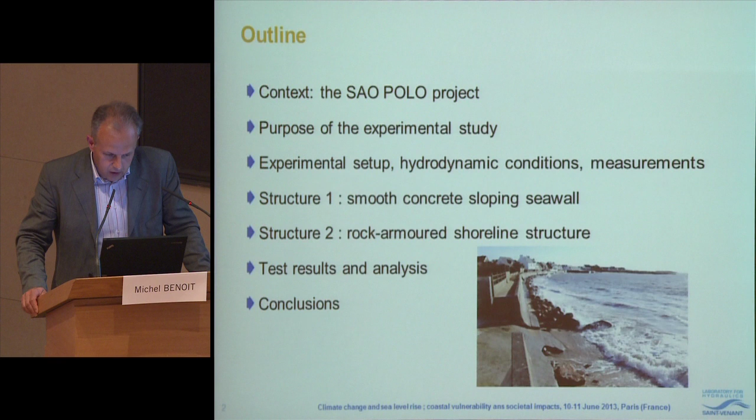The SAO POLO project stands for Stratégie d'adaptation des ouvrages de protection marine et des modes d'occupation du littoral vis-à-vis de la montée du niveau des mers et des océans, in French. You have an approximate translation in English just above.

It's a research program supported by the French program on management and impacts of climate change, partially supported by the French Ministry in charge of ecology, sustainable development and energy. Here you have the various participants in the project.

Cetmef was the leader, with Philippe Sergent responsible for the project. Also involved were the University of Compiègne, the University of Le Havre, and Le Havre city itself, along with ourselves, Reportex, and another body also belonging to Le Havre city, because one site of application of this research focused on the Le Havre area.

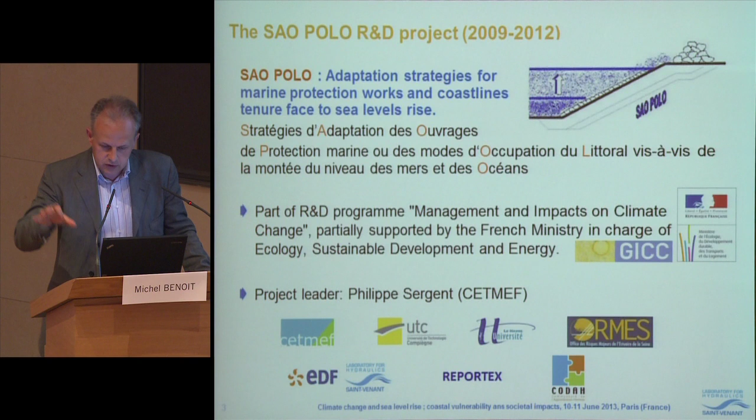The purpose of this project was to provide a coherent system of technical tools to enable the study and evaluation of adaptation strategies, for instance reinforcement of coastal defenses and so on. There were several work packages that you can read here - I won't go into detail on all of them, sorry.

My presentation today deals with items number 2 and 3: more precisely, estimating present and future performance of coastal structures, and studying reinforcement or modification of these structures. But there were other tasks focusing on evaluating the costs associated with these modifications, and developing a decision support system to help choose a strategy.

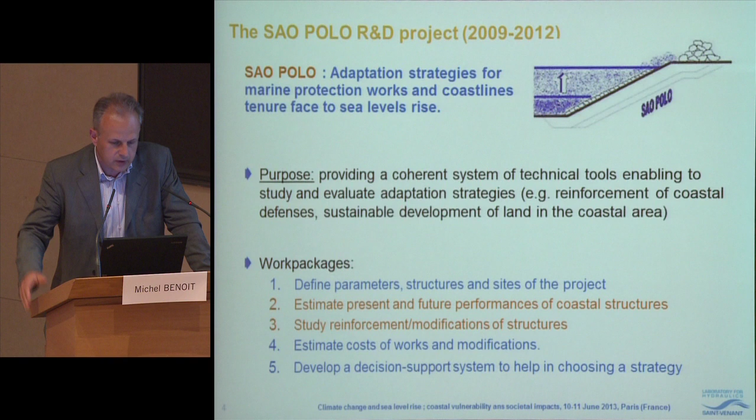The purpose of the part of the project I will present today is to evaluate the performance of structures, both in terms of overtopping rate - the volume of water which overtops the structure - and stability of the structure.

We do this under hypotheses for future sea level rise. In this study, we do not conduct specific studies on how sea level will rise in the future. We take results from other studies and use this data as input to fix future sea level in our experiments.

The idea is to test and compare various reinforcement solutions for future scenarios, and to find modifications and improvements that will permit keeping the same level of efficiency of protection as we have today in the present sea level condition.

To say it differently, this study is a technical contribution to the strategy of hold the defense. If we want to choose this strategy, this project and these tests were designed to see what modifications would be necessary to keep this goal. I do not claim this is the only strategy, of course, but just want to make clear that we are acting within this frame.

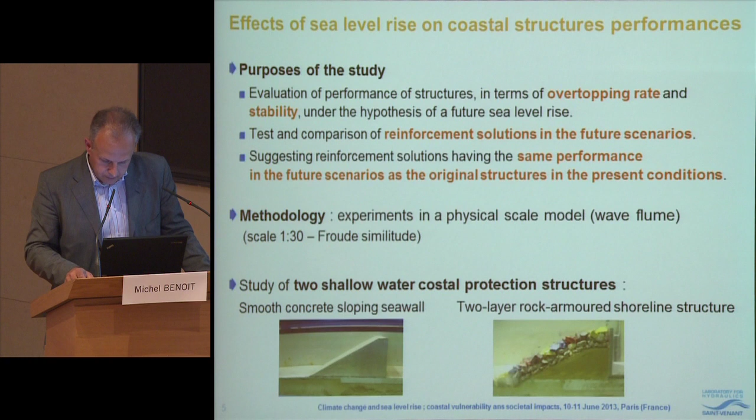The first one is a smooth concrete sloping seawall, so an impermeable sloping structure. And the second one is a rubble mound type structure, made of a core of rubble mound of sand or typical material, then an underlayer of rocks and one or two layers of rocks on the armor. For doing these experiments, we use one wave flume in Chatou.

So here you have the dimensions of the wave flume. Typical width of the flume is 60 centimeters, and the flume is equipped with a piston-type wave maker, which produces waves using a translation type of motion. It is computer controlled, and we can generate both regular, monochromatic, or irregular waves.

In these experiments, we used what we call irregular waves or random waves. We also have the possibility to absorb reflected waves from the structure by proper monitoring of the wave pattern. This is what we call an active wave absorption system.

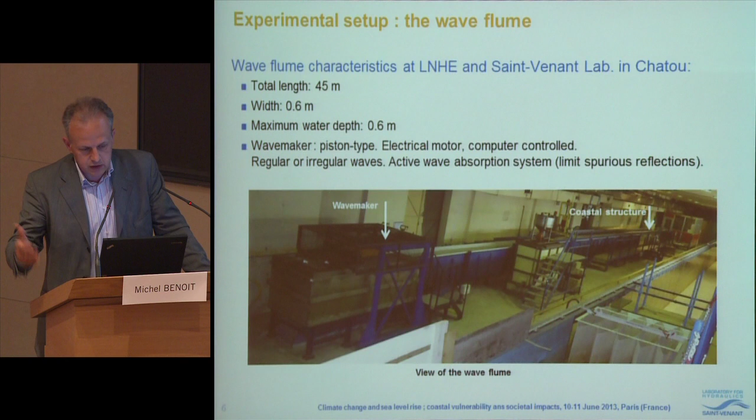So here you have a typical view of the experiments. The wave maker is on the right here. We have a sloping bottom with a mean slope of 5%, and then we have the structure under study, either a concrete structure or rubble mound structure as I said before. We have a number of wave probes here to measure incident wave conditions and also wave transformation on the sloping bottom.

The structure was designed so that in the present condition, the water depth at the toe of the structure corresponds to 3 meters. All the dimensions I will give refer to prototype values, so real values, not at the model scale.

For the present situation, we have a water depth of 3 meters at the toe of the structure, and we will carry experiments by increasing this water level first by 50 centimeters and then by 1 meter. So the depth at the toe will change to 3.5 meters and accordingly to 4 meters in the two scenarios.

So, wave conditions. For this study, we consider that the offshore wave conditions, the conditions created at the wave maker, do not change in future scenarios. This can be discussed, of course, but based on recent studies and ongoing studies that we are carrying out in the lab, there is no clear trend that wave height will increase or decrease significantly. So this assumption of keeping the same wave condition offshore seems acceptable.

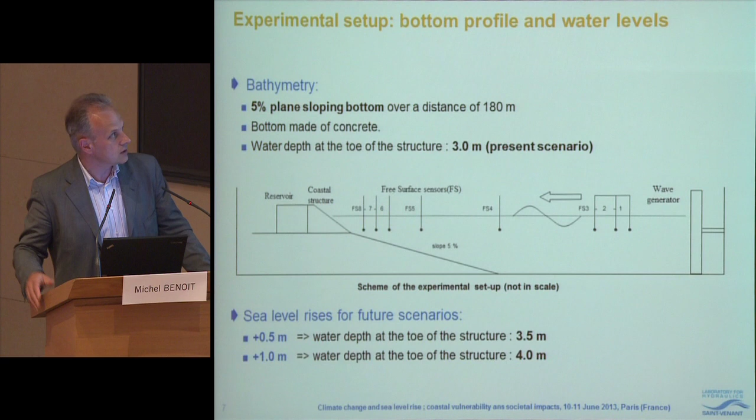But of course, this refers to offshore wave height, and as the water depth changes, the wave conditions at the structure will also change because of the larger water depth. So the waves that the structure will experience will change from the present situation.

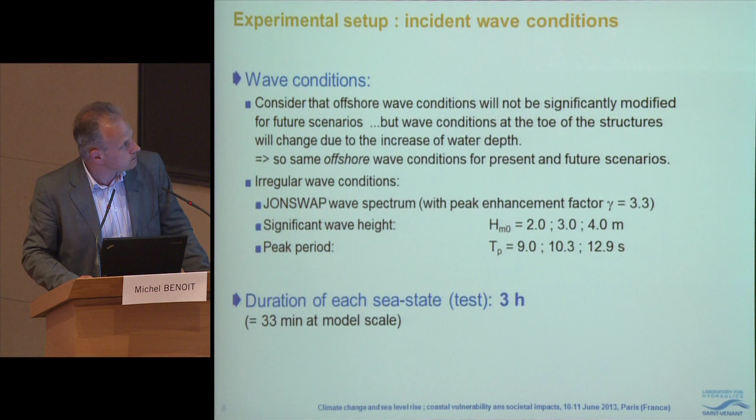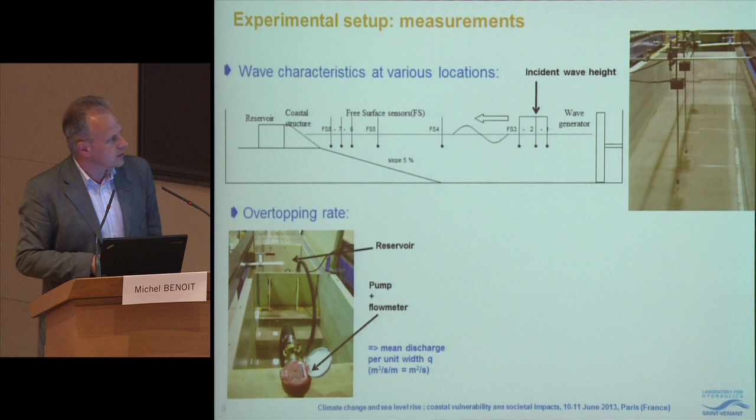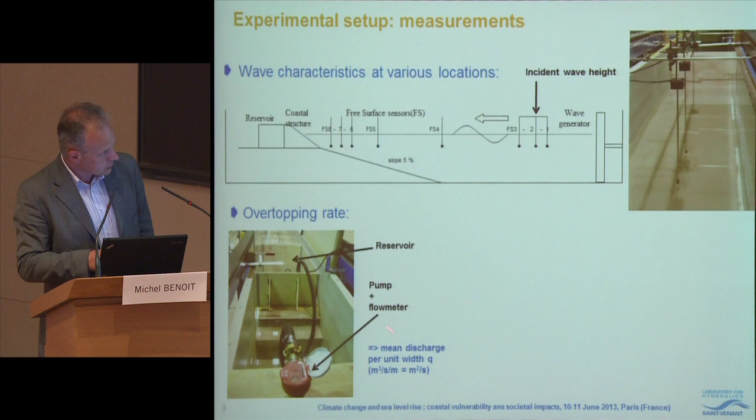And from this, we can compute what I call the mean discharge per unit width, small q, which is a discharge for unit distance in the transversal direction. So the unit of this q is square meter per second.

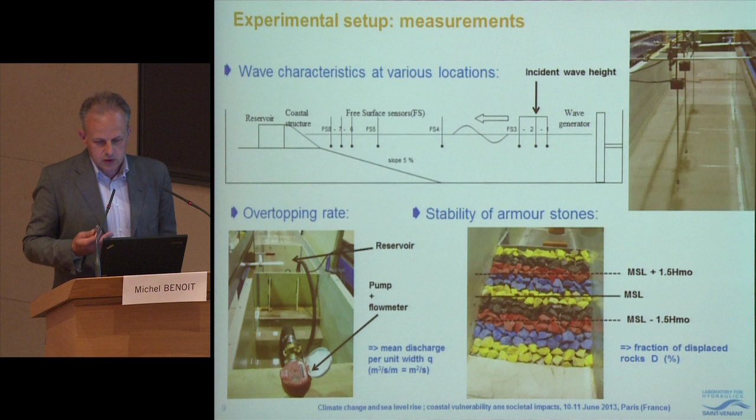And finally, for some structures, we also study the stability of the armor stones. The stones placed on the armor are painted with different colors, so it's easy to follow which stones are moving. We count the number of stones moving in a range of plus or minus 1.5 times the wave height from each side of the mean sea level at rest. This allows us to evaluate the fraction of displaced rocks, which I will call D, expressed as a percentage of displaced rocks.

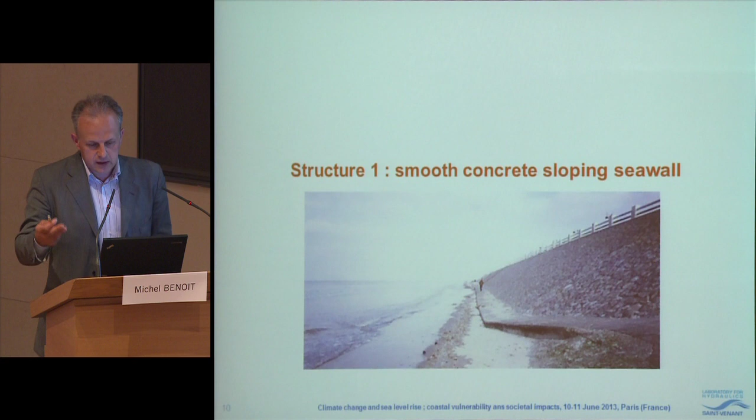So now I come to the first type of structure, which is a smooth concrete sloping seawall. Here you have a sample photograph of this type of structure. It's impermeable, a type of structure that we quite often find on beaches, on the upper part of beaches for instance.

And so in the model, it looks like this. It has a slope of 1 to 2, so 2 in the horizontal dimension and 1 in the vertical direction. The height of the structure was designed to have about 5 liters per second per meter of overtopping discharge in the present conditions, with a water level corresponding to a water depth of 3 meters at the toe of the structure. The crest elevation of the structure is 9.6 meters above mean sea level.

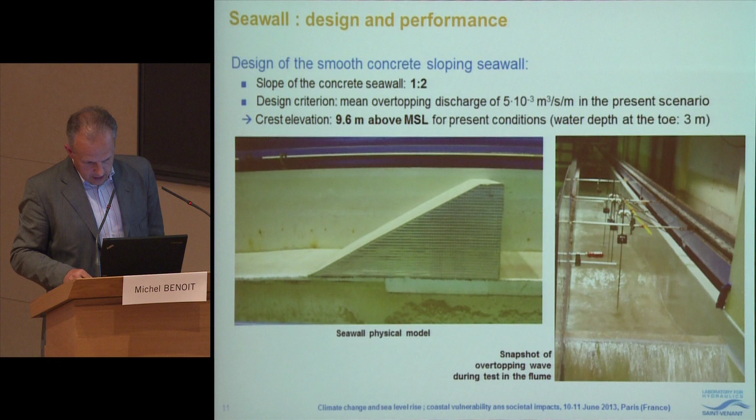So you have some snapshot photographs during tests in which you have some overtopping at this particular moment. I will not present all the results we obtained in these experiments, only some of them.

The first thing we did is to evaluate the increase of overtopping discharge when the water level is increased by 50 centimeters or 1 meter. Typically we represent results on this type of graph. Here you have the offshore significant wave height - we tested 3 values: 2 meters, 3 meters, and 4 meters. These are the results for only one of the 3 periods we considered, the period corresponding to almost 13 seconds.

On the vertical axis you have the unit mean discharge, with the target value of about 5 liters per second per meter as I said before. So in the present condition, this is the curve which describes the efficiency of our structure.

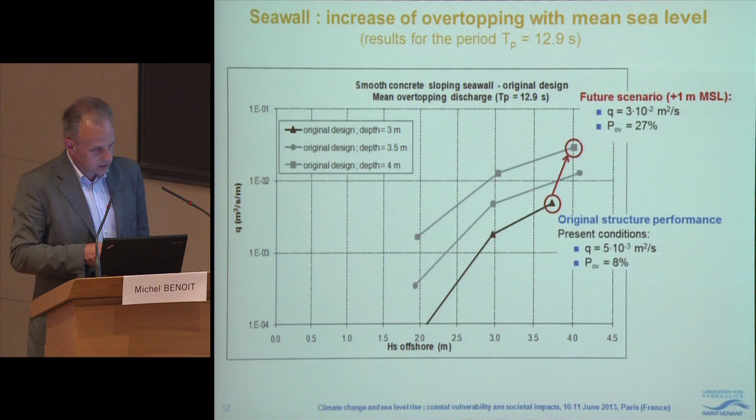For about 4 meters of significant wave height, we have this design overtopping discharge. If we increase the water level by 50 centimeters, and then by 1 meter, we obtain these two curves. As you can see, when the mean sea level is increased by 1 meter, the water discharge is multiplied by approximately 6 - so we have 6 times more water overtopping the structure in this condition.

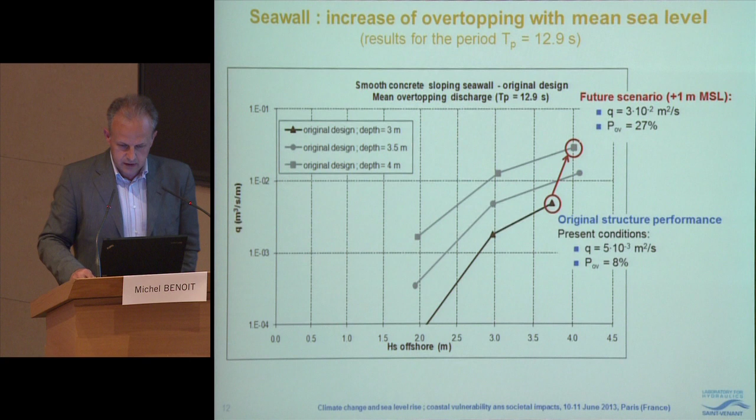So this is the first part of the study - knowing better what happens if we do nothing, keeping the structure as it is, so we have data to quantify the effect of increasing the water level. The second part is to test and study various modifications of the structure in order to recover the same efficiency as before.

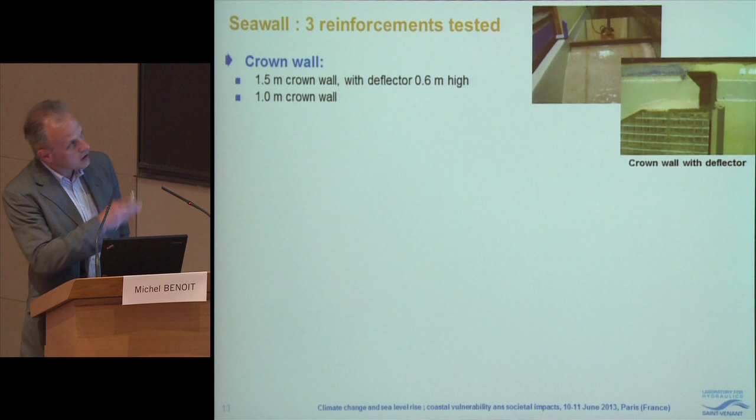So here we tested 3 modifications of the structure. The first one is building what we call a crown wall - a wall on top of the structure. Here you have a photograph. We tested 2 variants for this crown wall: the first is simply adding a vertical crown wall of 1 meter, corresponding basically to the increase of mean sea level. Then we tested another option with a 1.5 meter higher crown wall, also adding what we call a deflector, modifying the shape to improve its efficiency.

Then we also tested a solution which consists in putting rocks on the structure, and so we tested the possibility to add one layer of rocks or two layers of rocks. These stones were 4 to 6 ton rocks.

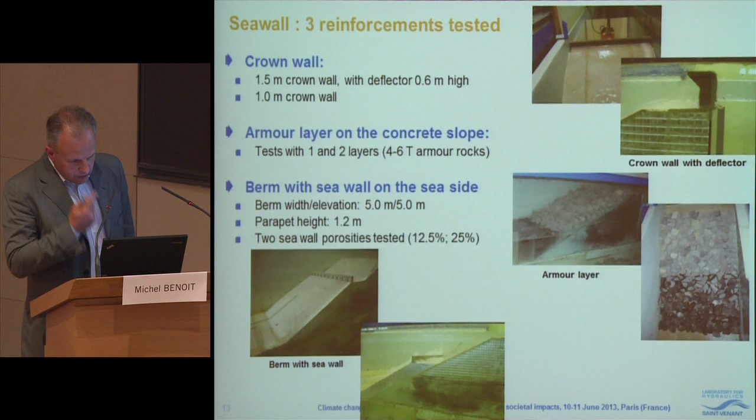The third option we considered was to build what we call a berm, an additional part in the structure. You can see it here in the side photograph. This is a horizontal berm plus a vertical wall with some porosity in it. Here are the characteristics of this wall: it's a 1.2 meter height parapet, this perforated wall, and we tested two porosities.

So we did quite a number of tests on these various solutions, and here I present you the results we got, the main results.

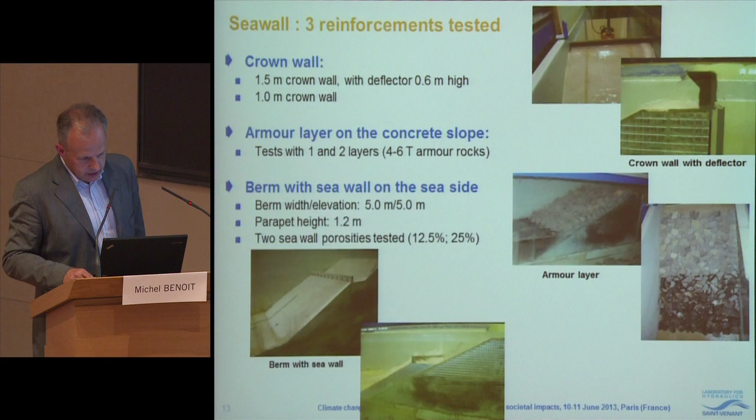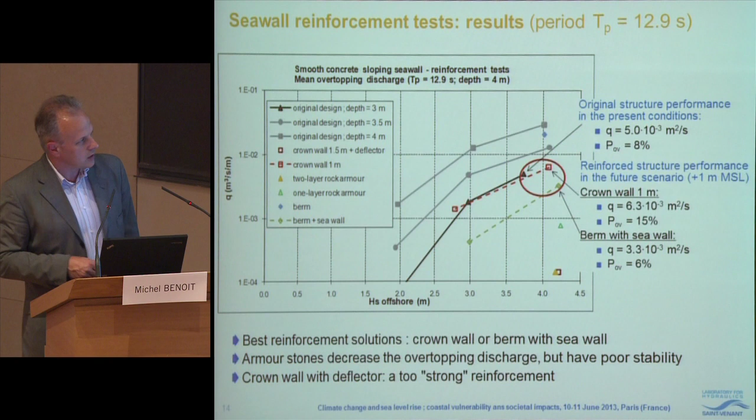So in this case, the structure which appears quite suitable was the crown wall, adding a vertical crown wall on top of the structure, and also the berm, adding a berm in front of the structure with a parapet. As I said, the armor stones put on the slope decrease the overtopping, so in this sense they are quite efficient, but they have insufficient stability. And the crown wall with the deflector is maybe, as I said before, a too strong reinforcement.

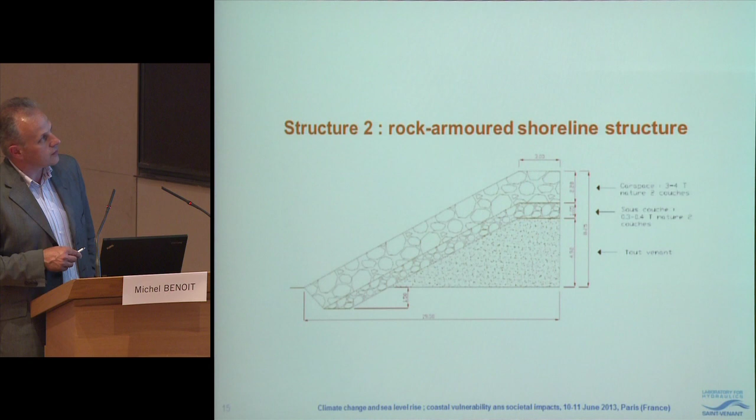So now I move to the second structure. This one is a rock armored shoreline protection, so again we have an underlayer of rocks and one or two layers of rocks on top. And we did the same type of study.

Here are the design criteria for this structure. Again, the slope is typically the same, 1 to 2, for this structure. We chose the size of the stones so as to have a level of damage lower than 5% in the present condition, with the mean sea level of the present condition. So we designed the weight of these stones to meet this criterion, and we used a double layer of stones which have a weight in the range from 3 to 4 tons.

And the crest elevation of this structure was also designed to have the same level of target water overtopping in the present conditions, the same value as before. This gives us the crest elevation of the structure above mean sea level for the present condition again.

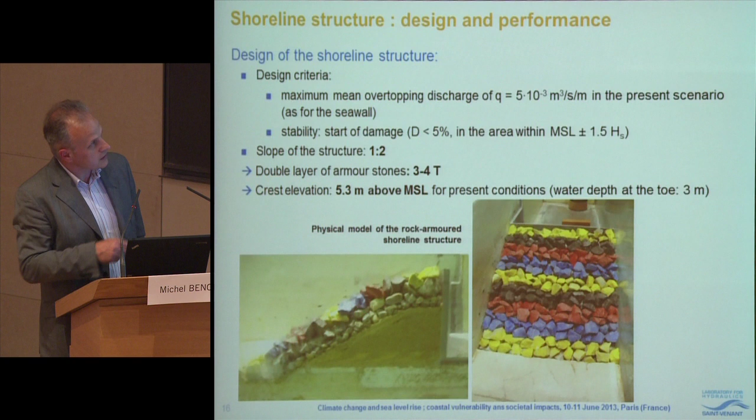We followed the same methodology, the same steps, starting by seeing what would be the increase of overtopping discharge if the water level is increased by 50 centimeters and then by 1 meter. If I plot the figure here, you have the present value, the overtopping discharge in the present condition. These are probabilities of overtopping, and this is the level of damage, a very moderate level of damage because we have 1.5%.

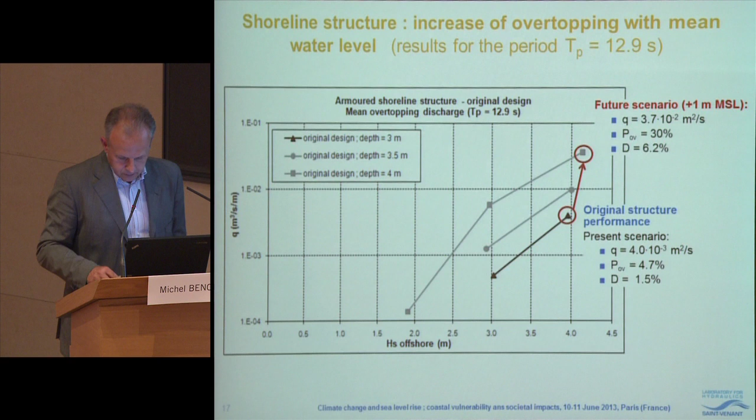If the mean sea level is increased by 1 meter, the overtopping discharge is increased by a factor of approximately 10. So we have a significant increase in overtopping discharge. Also the stability is lower because we now have more than 5% damage on this structure. So the second part of the study is to test various modifications to this structure.

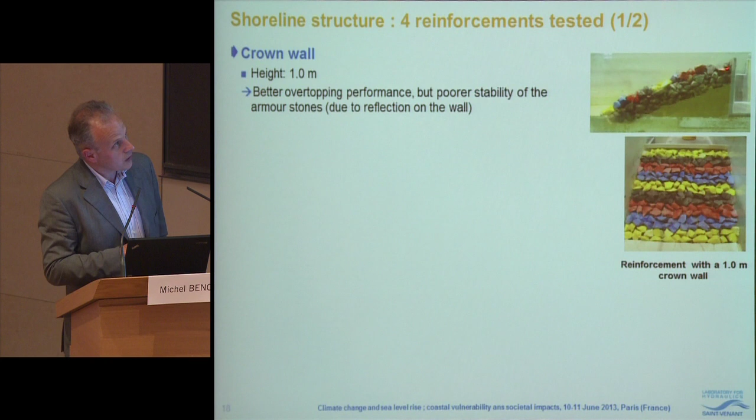For this case we tested 4 modifications. The first one is adding a crown wall on top of the structure, with a height of 1 meter. This allows us to increase the overtopping performance of the structure, but it also implies lower stability of the stones because of reflection on this vertical wall.

We also tested the option of using an additional layer of rocks, adding a third layer on top of the existing armor, because this might be a solution in practice. We combined this with a crown wall. So we tested, in fact, 5 options on this case.

We used 2 categories of rocks: the 3 to 4 ton category, same as the present one, and the 5 to 6 ton category, which is heavier than the present ones. We also tested various heights of the crown wall, from 1 meter to 2 meters.

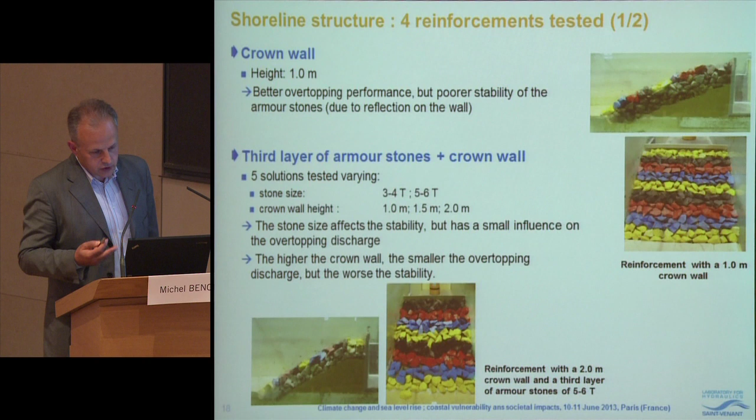What we observed is that stone size affects stability. Of course the heavier stones are more stable, but there's no clear difference between these two categories in terms of overtopping discharge. We also saw that the higher the crown wall, the smaller the overtopping discharge, but also the worse the stability.

We also tested the option of modifying the slope of the structure, to have a milder slope of 1/3. This allows us to use lighter stones, so a lighter category of stone is enough if we modify the slope of the structure.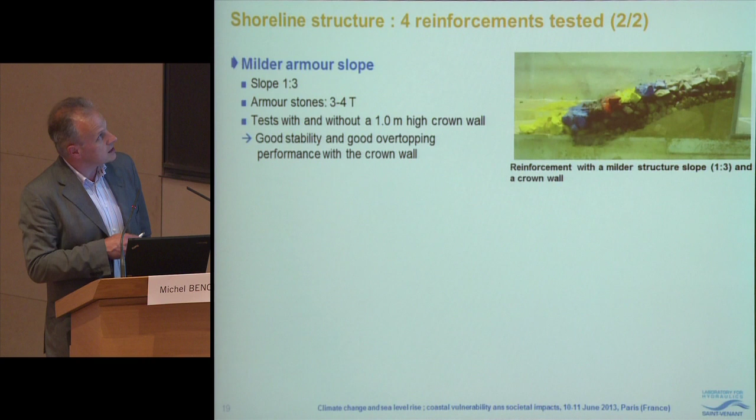We tested this with or without a 1 meter high crown wall. In this case we obtain good stability and also good overtopping performance with the crown wall only.

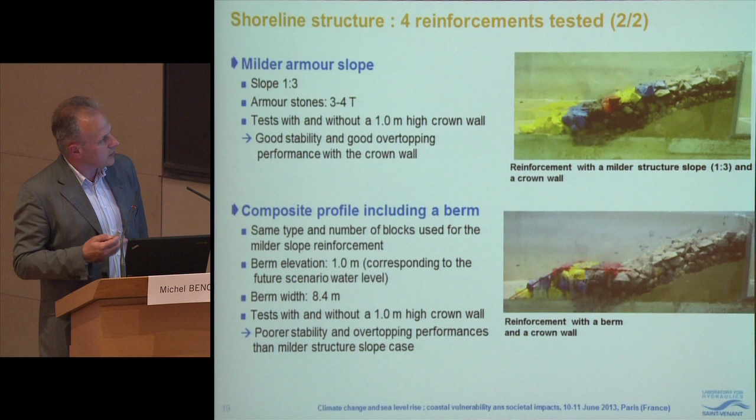Finally, the fourth option was to build what we call a berm in front of the structure. Here you can see the characteristics of this berm. The level of this berm corresponds to the future mean sea level, the present mean sea level plus 1 meter. We tested this solution with or without a crown wall 1 meter high, and this showed poorer stability and overtopping performance than the other option.

These observations are plotted on these graphs which sum up all the tests we did. Again, the target is for the colored points to be near these black triangles in the future condition. In this case, most of the solutions were unable to reduce the overtopping sufficiently to recover the target value.

The two most efficient solutions were adding a third layer of heavy rocks plus a crown wall of 2 meters, quite a high crown wall, where the height of the crown wall is twice the increase of the mean sea level, and also using a milder slope with a crown wall of only 1 meter.

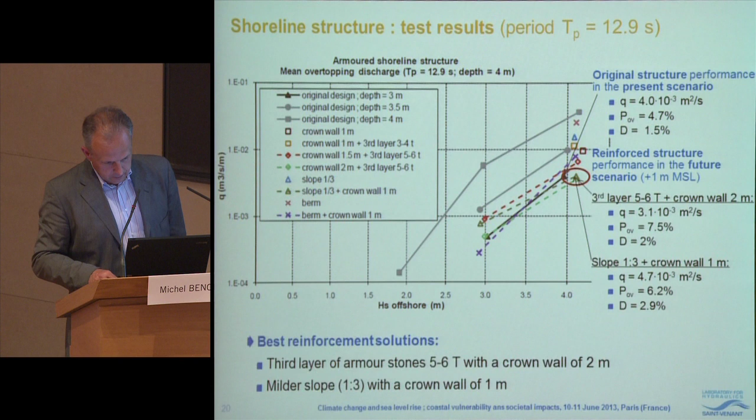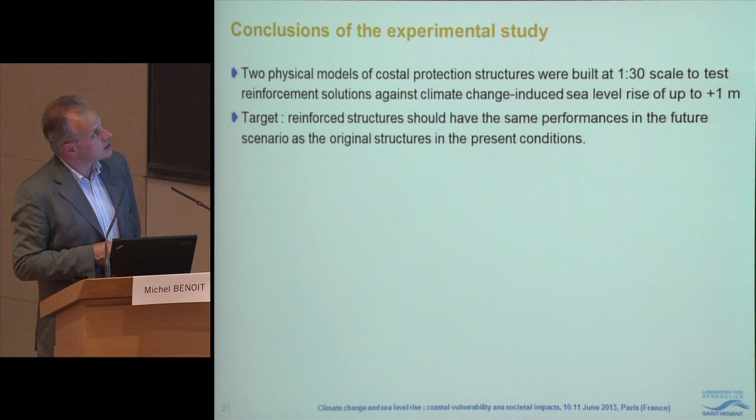Coming to the conclusions: two physical models were built to do these experiments. In terms of overtopping discharges, the use of a parapet on a berm on the seaside or on the structural crest, namely a crown wall, is necessary to limit the overtopping discharge independently from the structure considered. We observed this both on the sloping wall and on the rubble mound breakwater. We also observed that stone size does not have a significant impact on the overtopping performance of the structure, among the values we considered in this test.

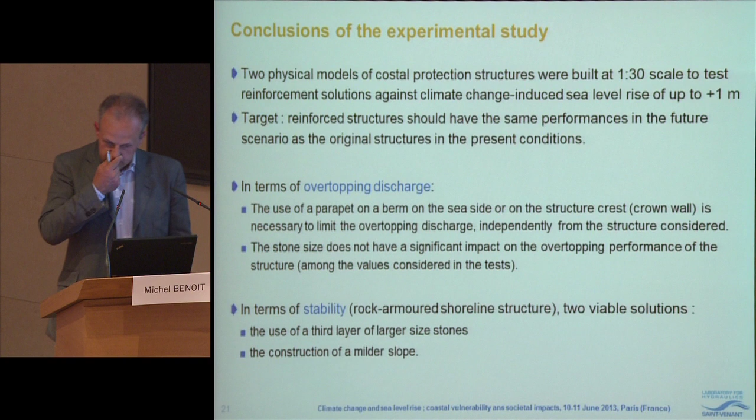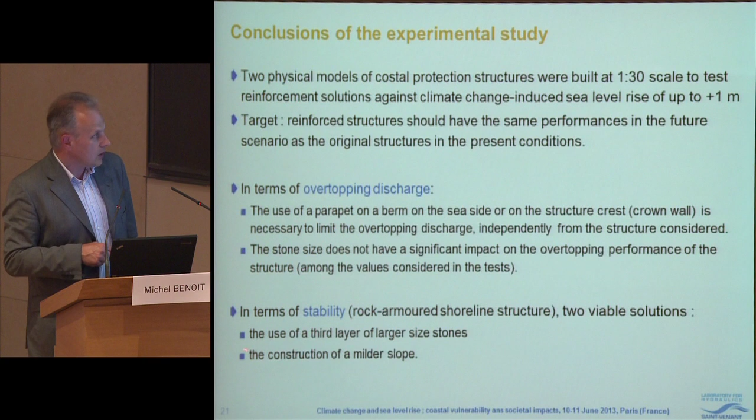In terms of stability, which applies for the second structure only, there are two viable solutions: the use of a third layer of larger size stones, or the construction of a milder slope. Thank you for your attention.